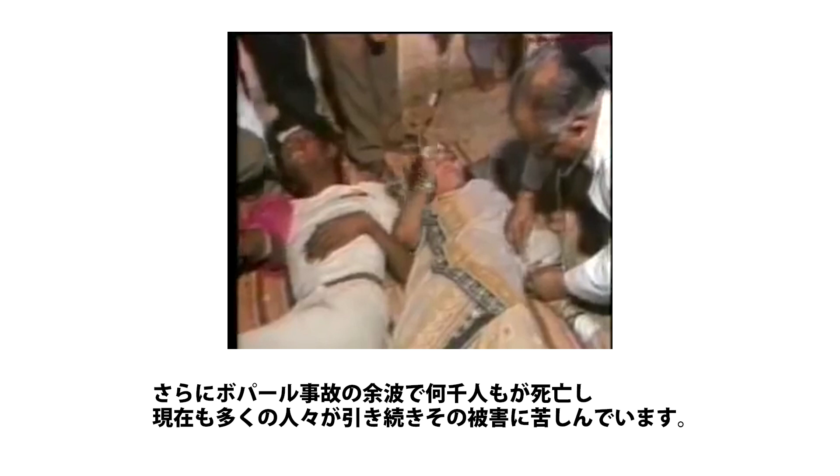Thousands more died in the aftermath of Bhopal, and tens of thousands continue to suffer today. But Bhopal also brought about change. Bhopal totally changed the understanding of potential process safety hazards in the chemical industry. Bhopal spurred Congress to require new OSHA and EPA regulations covering chemical process safety. And Congress established the CSB to independently investigate chemical accidents.

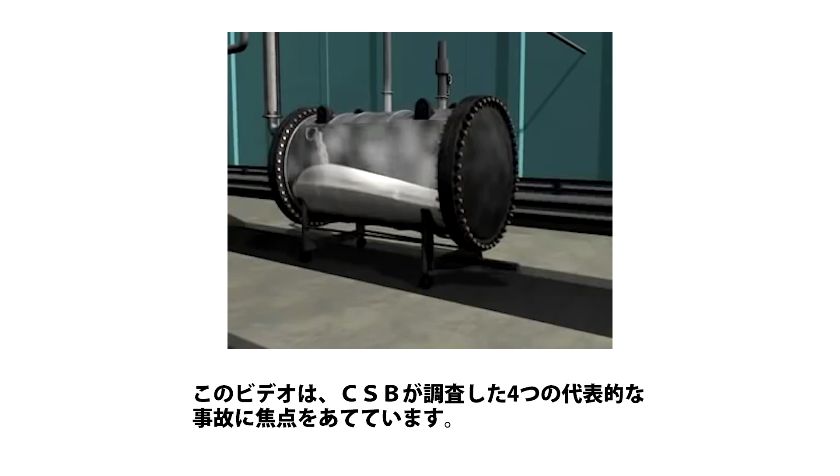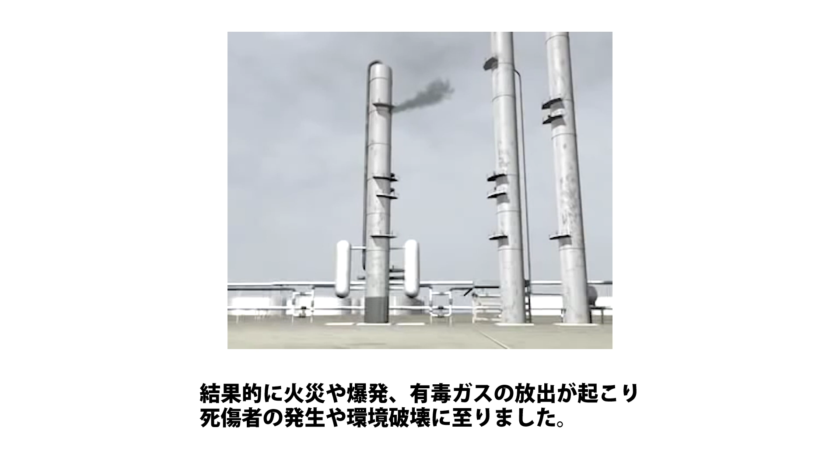There have been many positive changes in chemical industry process safety since 1984, when the Bhopal nightmare occurred. But the CSB has found that accidents involving reactive chemicals still occur all too frequently, and often with tragic results. This video focuses on 4 major accidents investigated by the CSB, accidents that demonstrate what happens when reactions run out of control, resulting in fires, explosions, and toxic releases that cause death, injury, and environmental damage.

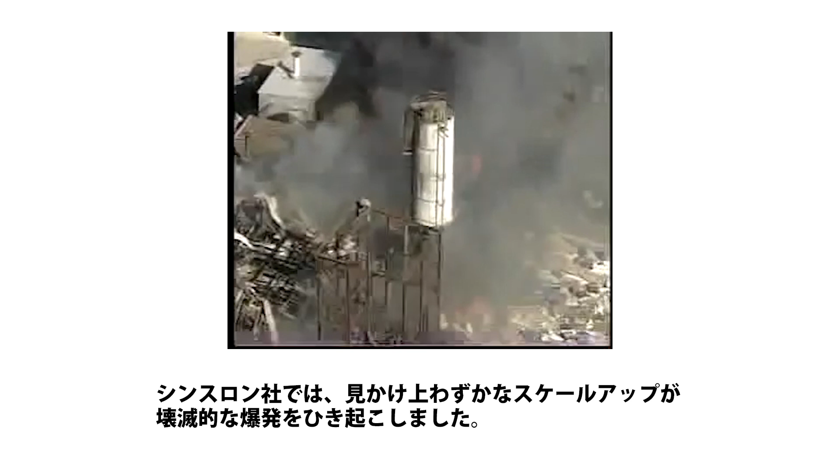Such an accident unfolded on the morning of January 31, 2006, when a vapor cloud exploded at the Synthron acrylic polymer manufacturing plant in Morganton, North Carolina. The blast killed 1 worker and injured 14 others. It destroyed the facility and damaged nearby structures. At Synthron, a seemingly minor increase in the size of a production batch led to a catastrophic explosion. It was a tragic example of what happens when process changes are not managed carefully.

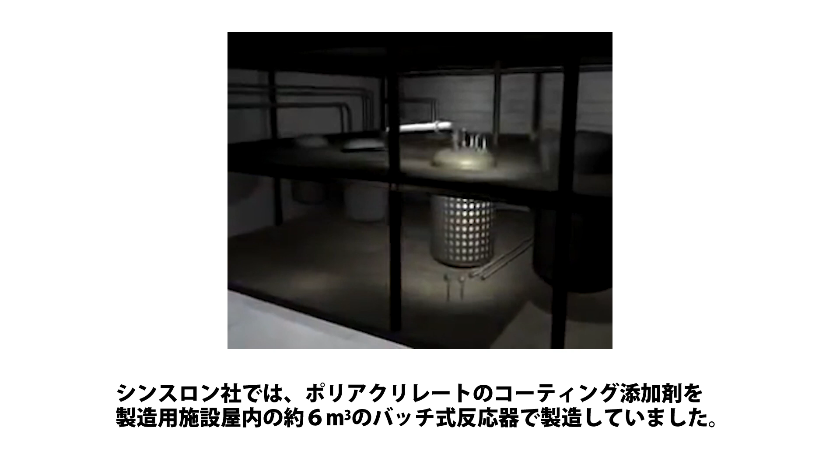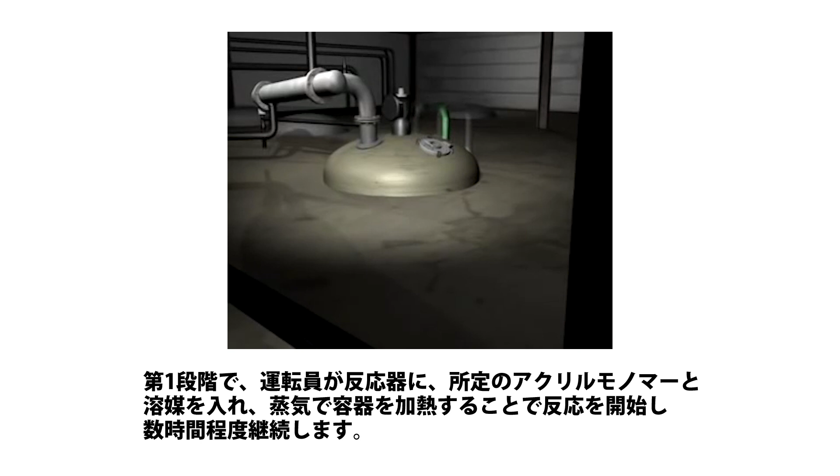Synthron manufactured acrylic polymer coating additives in batches using a 1,500-gallon reactor located inside a production building. The company had produced the polymers for years without serious incident, typically using a 2-step process. In the first step, operators would partially fill the reactor with acrylic monomer and solvent, warm the vessel with steam, and then initiate and run the reaction for up to several hours. Later, in a second step, operators would gradually pump in the remaining acrylic monomer and continue the reaction until the vessel was nearly full of product.

Both steps of the reaction generated heat, causing the solvent to boil. An overhead heat exchanger condensed the hot solvent vapors and sent cooler liquid back into the reactor, keeping the temperature and the reaction under control.

Shortly before the accident, Synthron received an order for an acrylic product that was 12% larger than the standard batch size. Rather than fulfilling the order by making 2 smaller batches, managers decided to make a single, larger batch and to add all of the extra acrylic monomer during the first step of the process. But this was a critical mistake. Adding the extra monomer all at once more than doubled the heat released by the reaction.

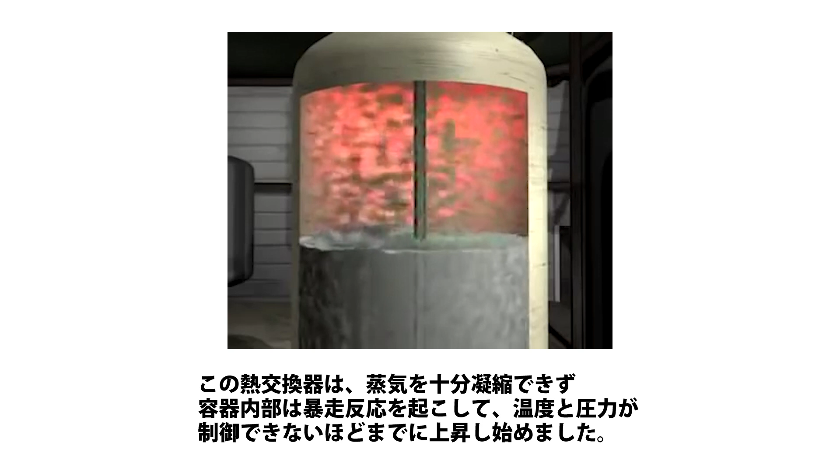The heat exchanger could not condense the vapor quickly enough, and the temperature and pressure inside the vessel began to rise uncontrollably in a runaway reaction. The pressure caused the gasket on a hatch to fail, releasing flammable solvent vapor into the building. Employees heard a loud hissing sound, saw the escaping vapor, and fled the building. 4 workers gathered outside a doorway, where they were joined by the plant superintendent and the plant manager.

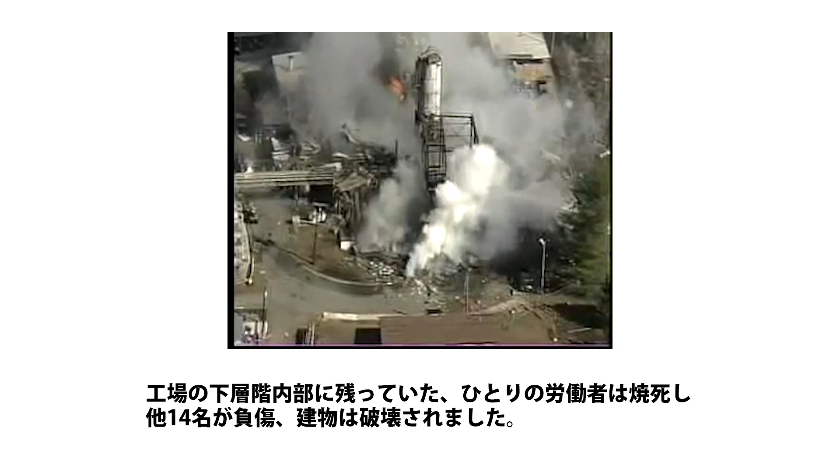One of the operators went back inside the building in an attempt to send emergency cooling water to the reactor. But it was too late. The operator returned to his companions outside. Seconds later, the solvent vapor in the building exploded. A worker who had remained inside the lower level of the plant was fatally burned, and 14 others were injured.

The building was destroyed. The Synthron accident underscores the need for well-rehearsed evacuation plans. Furthermore, it's critically important for companies to carefully review the effects of making even small changes to reactive process conditions.

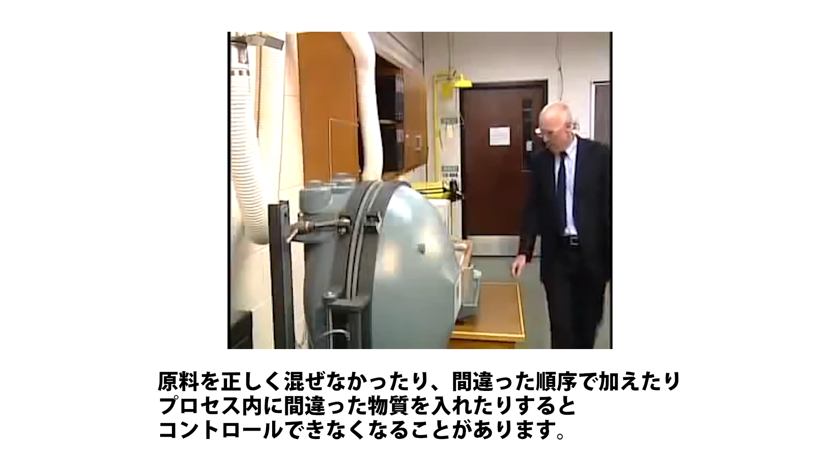Anytime you are rearranging molecules, you have reactive chemistry, and the potential for a reactive chemicals accident is possible. Dr. Daniel Crowl is a chemical engineering professor and process safety expert. If you don't mix the raw materials properly, if you add them in the wrong order, if you add the wrong materials into your process, you will lose control of the mass.

In 2002, the CSB completed a comprehensive study of reactive chemical hazards, issuing key safety recommendations to OSHA and the EPA, as well as trade and industry groups. A number of the recommendations have yet to be adopted. The report identified 167 serious accidents involving uncontrolled chemical reactions in the United States over 2 decades, causing 108 deaths and hundreds of millions of dollars in property damage. More than half involve substances not covered under current federal process safety regulations.

Between 2002 and 2007, the CSB investigated 10 additional serious reactive accidents and identified many others that caused deaths, injuries, evacuations, or property damage. Just because the initial screening method says you probably don't have a clearly identifiable reaction hazard, that doesn't mean that that reaction hazard doesn't exist. And you probably need to look into your chemicals and their properties and their reactive nature a lot more thoroughly than you think you need to.

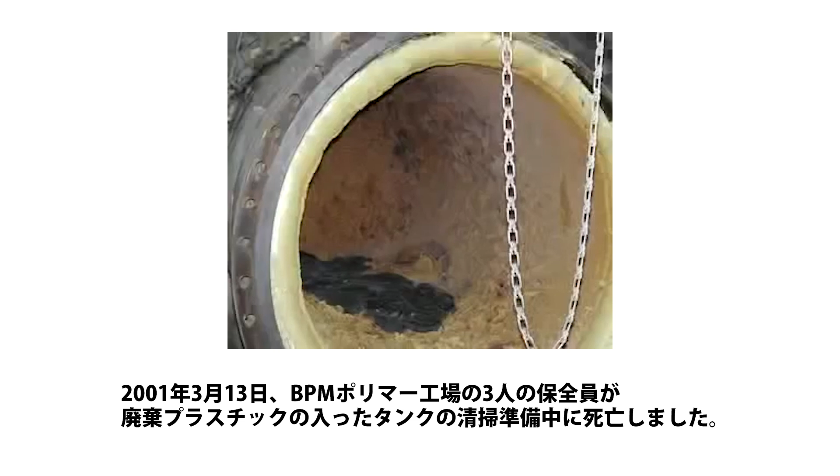Reactive incidents can occur even when plant personnel are unaware that chemical reactions are taking place. That's what happened at an Augusta, Georgia plastics manufacturing plant in 2001. On March 13, 2001, 3 maintenance workers at the BP Amoco polymers plant were killed while they were preparing to clean out a tank that held waste plastic.

BP Amoco made high-performance nylon by pumping raw materials through a heated reactor and then using an extruder to form the hot plastic into solid pellets.

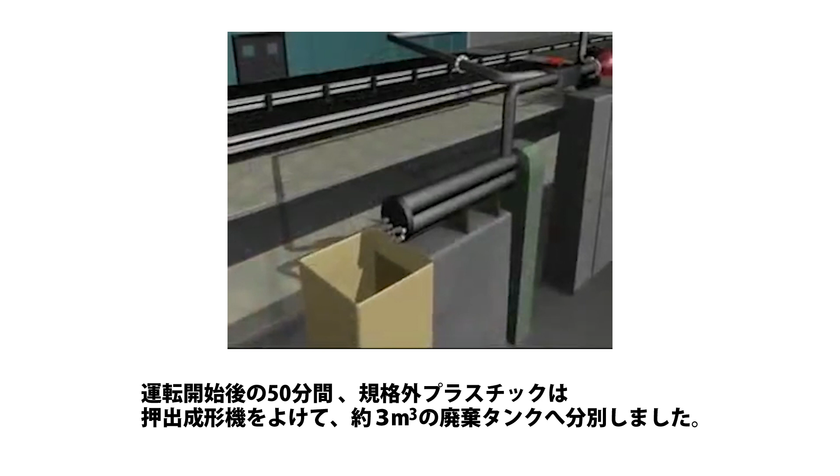During the first 50 minutes of startup, plastic considered unusable was diverted away from the extruder to a 750-gallon waste tank. Steam and gases escaped through a vent in the waste tank, preventing any accumulation of pressure inside. The contents of the tank were allowed to cool down over a period of hours. Workers then opened the cover to remove the waste plastic.

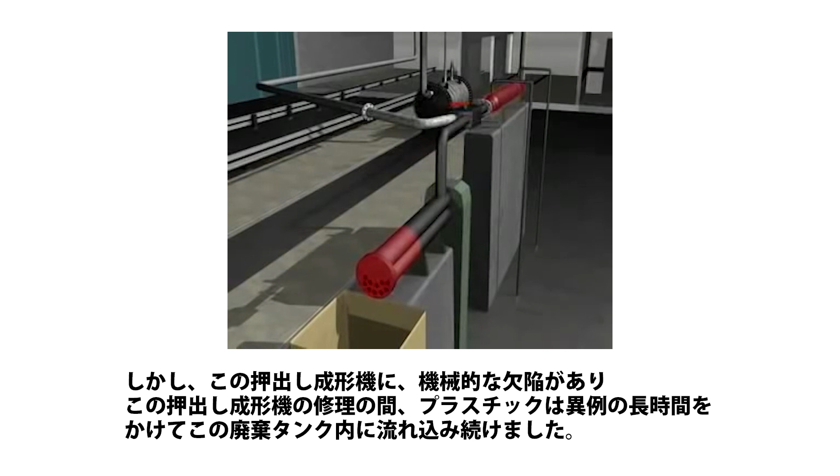On the afternoon before the accident, operators began to start up the process, but there was a mechanical failure in the extruder. While the operators tried unsuccessfully to fix it, hot plastic continued flowing into the waste tank for an unusually long time. Supervisors eventually aborted the startup, but by then the waste tank had already overfilled with molten plastic.

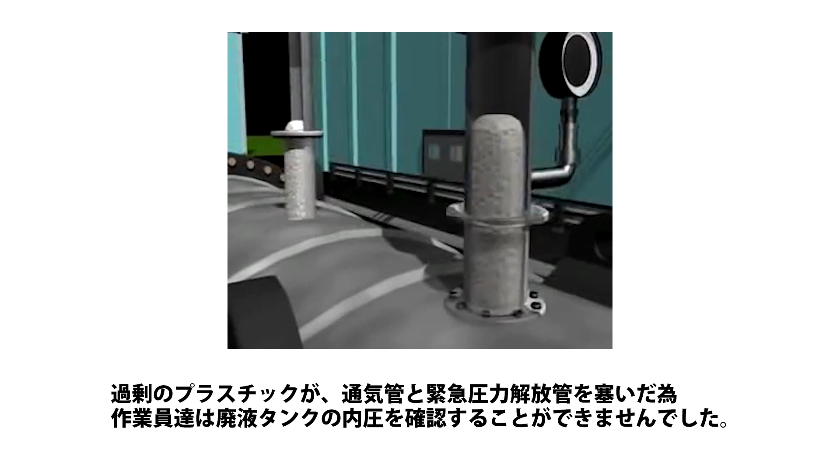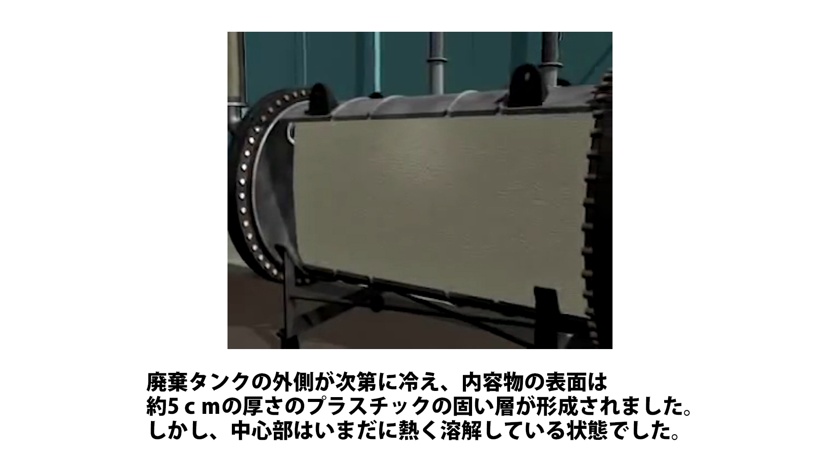The excess plastic clogged the vent line and the emergency pressure relief line. With the lines and pressure gauge now sealed off, workers would have no reliable way of determining whether the tank was under pressure. As the outside of the waste tank gradually cooled, a hard plastic layer several inches thick formed around the inside surface of the tank, but closer to the center, the plastic still remained hot and molten.

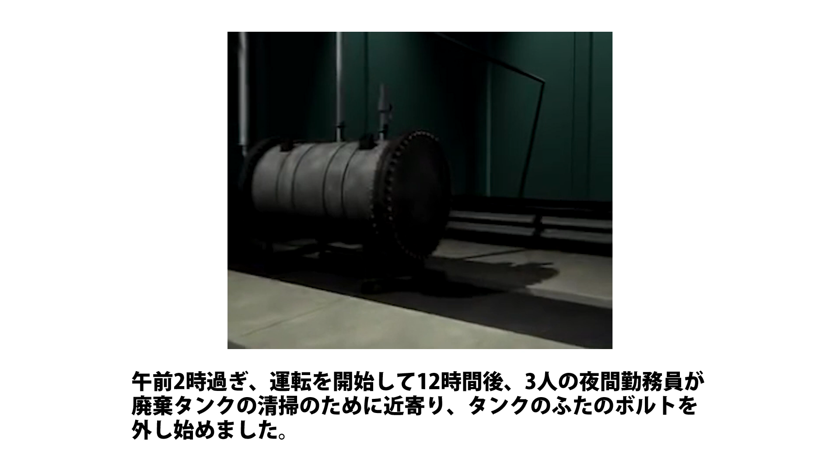Unknown to workers, a slow decomposition reaction was occurring inside the molten plastic. Over a period of hours, the hot plastic molecules were breaking down, forming gas bubbles and causing a dangerous buildup of pressure. Just after 2 a.m., 12 hours after the startup attempt, 3 night shift workers approached the waste tank to clean it out.

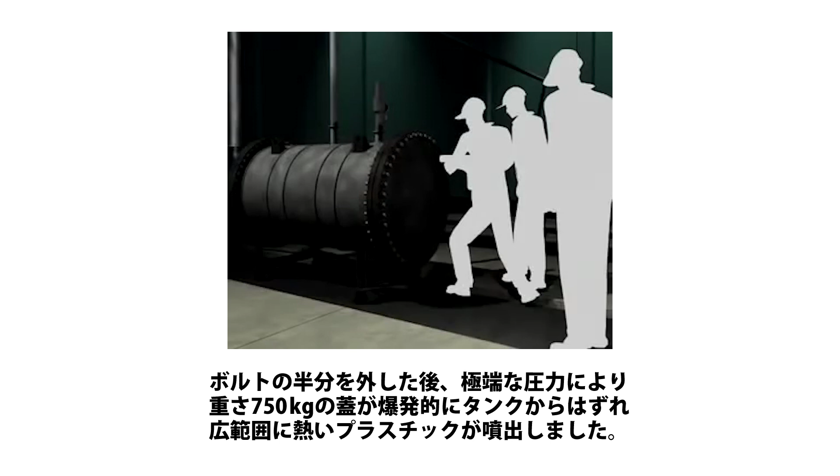The workers began to unbolt the cover of the tank. After they had removed half the bolts, the extreme pressure blew the 1,650-pound cover off the tank with explosive force and ejected hot plastic over a wide area. The waste tank recoiled backward, breaking hot oil pipes and creating a vapor cloud which ignited 6 minutes later.

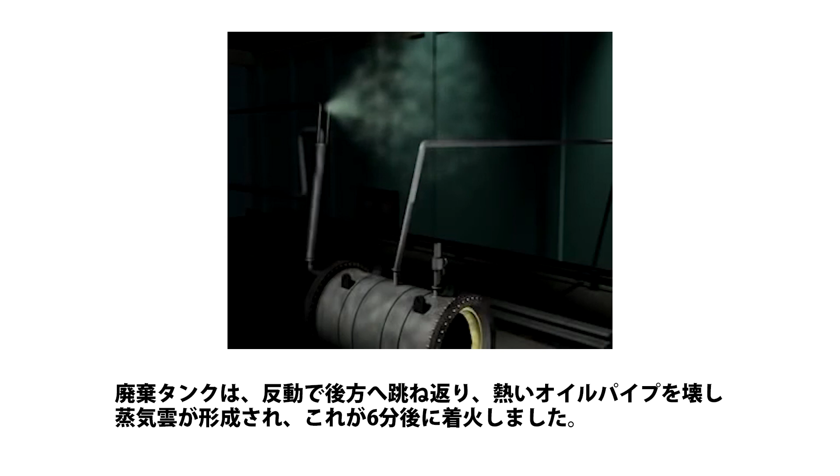Two of the maintenance workers were killed instantly when the tank cover blew off. The third was pronounced dead on arrival at a hospital.

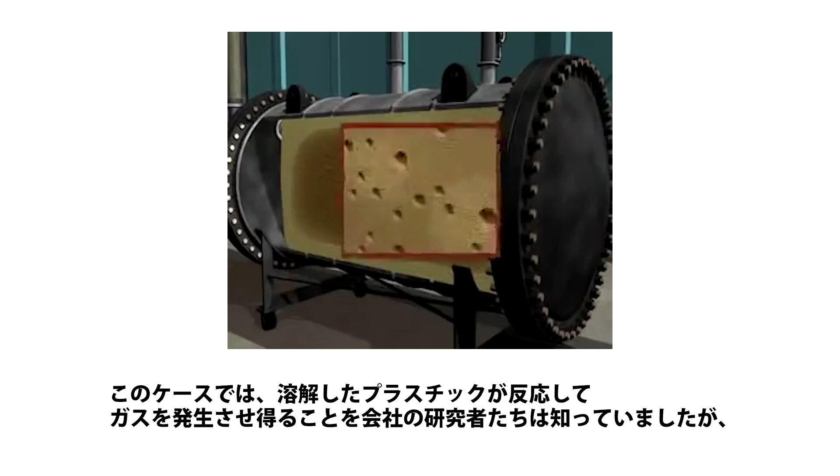This accident shows how even slow chemical reactions that don't produce any heat can still be hazardous. In this instance, company researchers knew that molten plastic could react to produce gas, but that information was not sufficiently incorporated in the design of the process or communicated to workers.

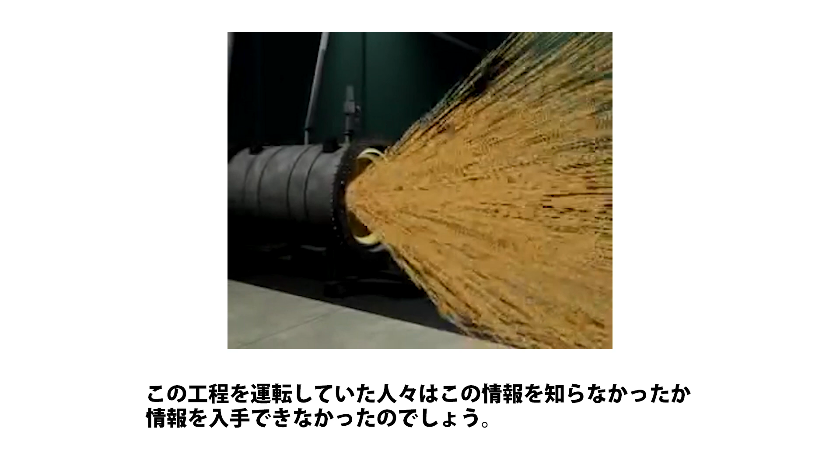I think that is one of the main issues. And it's not so much that nobody was aware of that information, but rather that the people who were actually operating the process didn't have the information or didn't have access to it. But somebody, somewhere, even within the same organization, often had that information. So a lot of the problem, I think, is education and awareness.

If you were never in an explosion, it's a horrible feeling. You'll never forget it.

Robert Oliver was a victim of a reactive chemical accident at Morton International in 1998 in Paterson, New Jersey. He and other survivors spoke about the human impact of such accidents at a CSB public hearing on reactive hazards in 2002.

I hope this would help not only the United States, but the whole world to be more careful or get more insight on the chemical that they're working with.

I can remember when the fireball hit. I can remember being blown through the air. I can remember the fire. I remember the pain. I lost track of time. I went blank or something. I don't know how I got out of that area.

If my coming here today should save one life or stop somebody else from going through the nightmare I have been living, then it's worth coming here and going through the pain of living it again.

Thank you. The CSB's 2002 study found that over 90% of serious reactive chemical accidents involve hazards that have already been described in the publicly available literature.

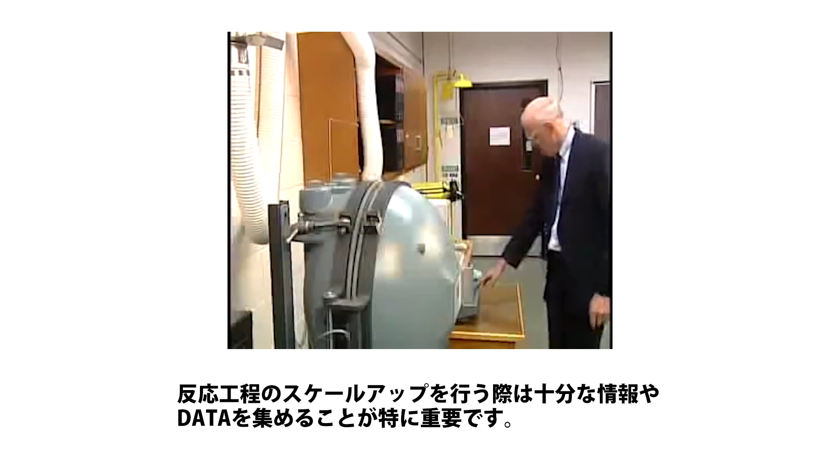The board recommended that, to better understand reactive hazards in their processes, companies should consult multiple sources of information and conduct specialized testing if necessary. Collecting adequate safety information and data is especially important when scaling up a reactive process.

On April 12, 2004, the MFG Chemical plant in Dalton, Georgia, experienced a runaway chemical reaction. It caused the release of highly toxic vapors into a residential community. The CSB determined that the accident occurred because MFG did not safely scale up a chemical reaction from the laboratory to a large production vessel.

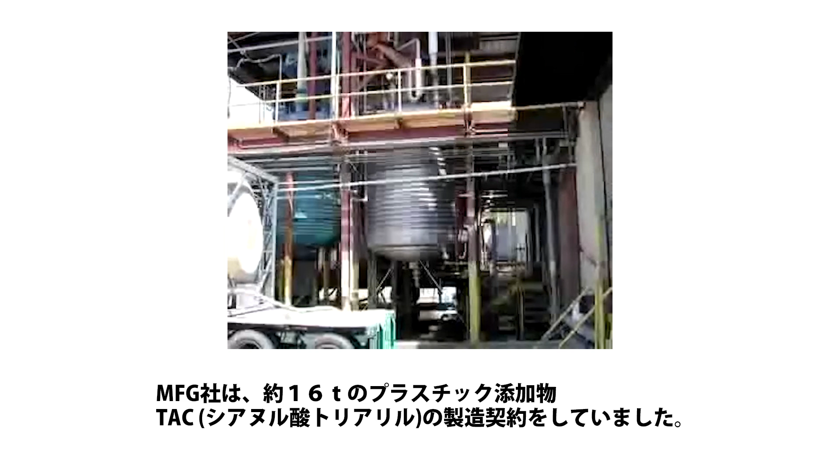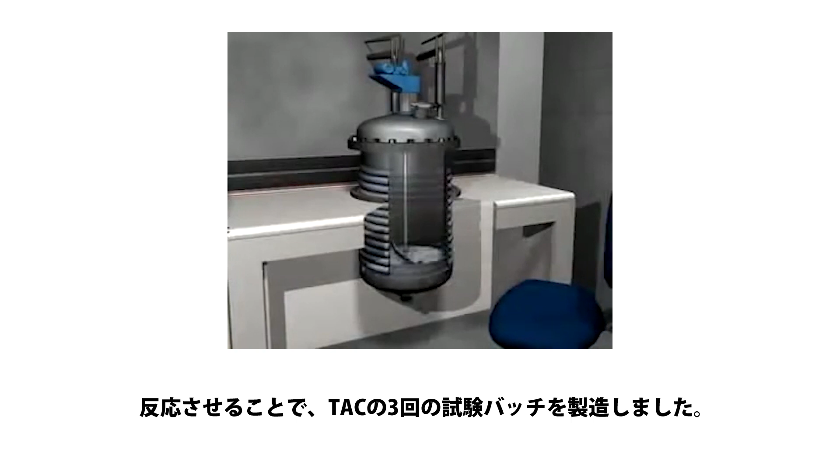MFG was contracted to manufacture 35,000 pounds of a plastics additive called triallyl cyanurate, or TAC. The company produced 3 trial batches of TAC by reacting allyl alcohol and cyanuric chloride inside a small 30-gallon test reactor. In the first 2 tests, operators controlled the exothermic, or heat-producing, reaction by adding one of the raw materials in small portions. In the third test, all of the chemicals and a catalyst were combined in the test reactor at one time, which was the procedure that MFG later decided to use when scaling up to full production.

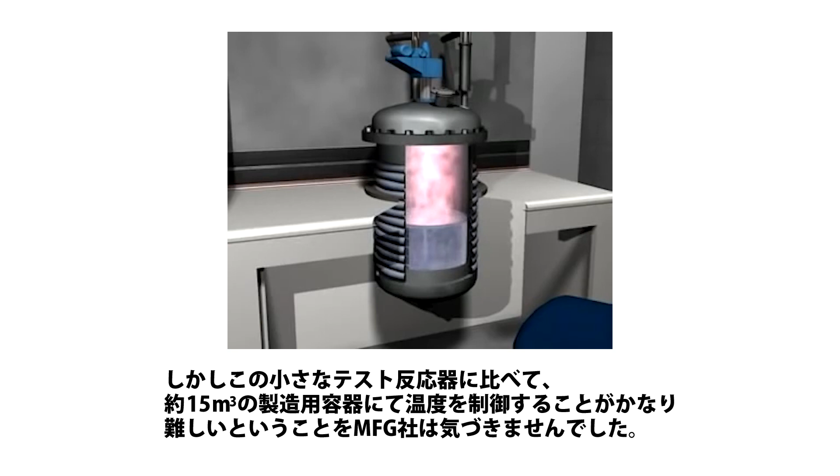This third test produced significant heat, but the water cooling jacket around the small vessel was able to keep the temperature low and control the reaction. However, MFG did not realize that compared to the small test reactor, it would be far more difficult to control the temperature in the 4,000-gallon production vessel. The surface area to volume ratio was much lower in the production vessel than in the test reactor.

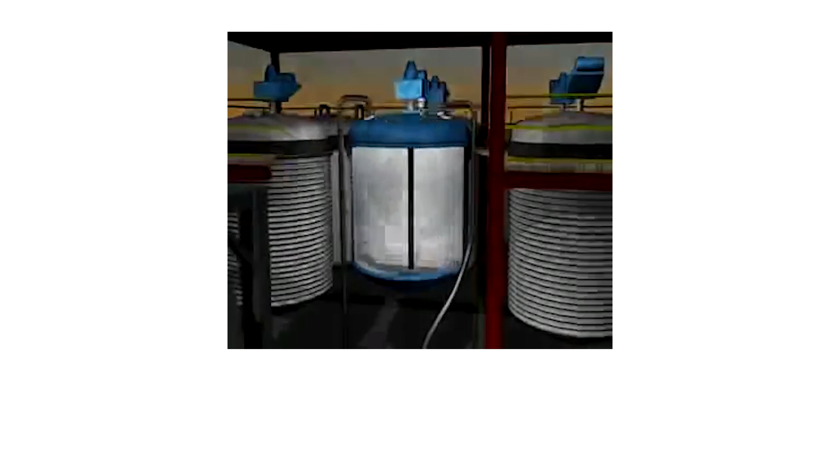Starting the production process for the first time, operators loaded the large vessel with all of the cyanuric chloride powder and the catalyst. They then added all of the allyl alcohol and began mixing the chemicals.

To control the temperature, MFG had rented a portable chiller and connected it to the cooling jacket on the vessel. But as soon as all of the raw materials were combined, the reaction began producing heat faster than the cooling system could remove it. The temperature increased uncontrollably, and with all of the raw materials already in the vessel, nothing could be done to control the reaction.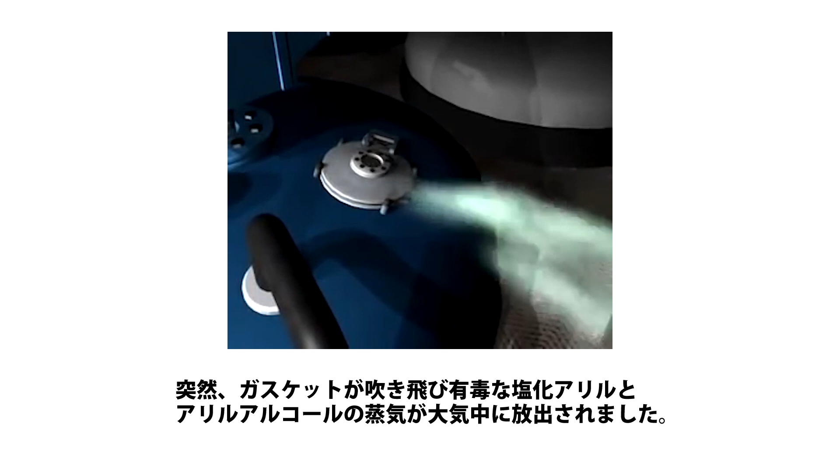The pressure inside the reactor climbed rapidly as the mixture heated. Suddenly, a gasket blew out, releasing toxic allyl alcohol and allyl chloride vapors into the atmosphere. About 10 seconds later, the emergency pressure relief rupture disc burst open, releasing more vapor.

Unable to slow the reaction or contain the release, the operators were forced to evacuate to a safe location upwind. The toxic vapors quickly spread into the residential neighborhood east of the facility. Authorities ordered the evacuation of more than 200 families, but the town had not trained or equipped its emergency responders for such an accident. 154 people had to be decontaminated, including 15 police and ambulance personnel.

This accident emphasizes the need for emergency responders to be fully prepared for a toxic chemical release.

The CSB found the company could have prevented the accident by better understanding the chemical process and knowing how to prevent a runaway reaction. You don't want to be learning about chemical reactions in a 5,000-gallon vessel. You want to learn about it in a small vessel in the laboratory and understand what's going on, so that by the time you get to the large manufacturing vessel, you already know those things. You don't want to get surprises on a large scale.

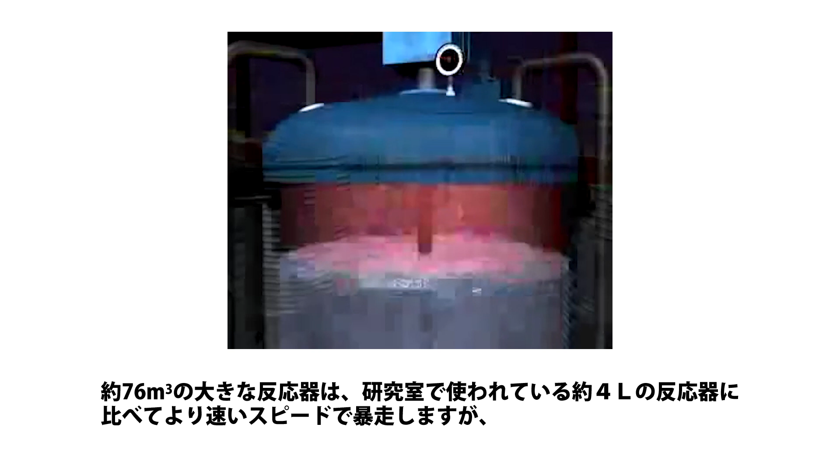A large 20,000-gallon reactor will run away a lot faster than a 1-gallon reactor that you're using in the laboratory. And somehow human nature is to believe that larger is slower, and in the case of reactive chemicals, a larger chemical reactor will actually run away a lot faster than a smaller chemical reactor.

Chemical reactions where high temperatures cause decomposition can produce powerful explosions. Few people realize how much destructive energy can be released, as in the following accident at a Mississippi chemical plant.

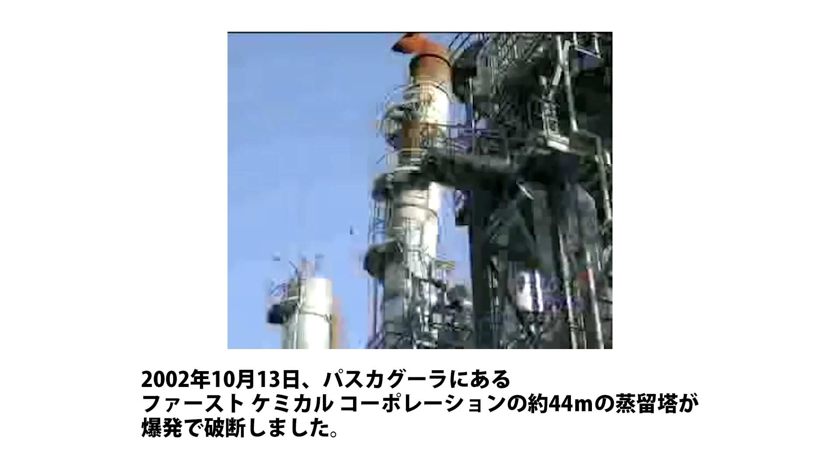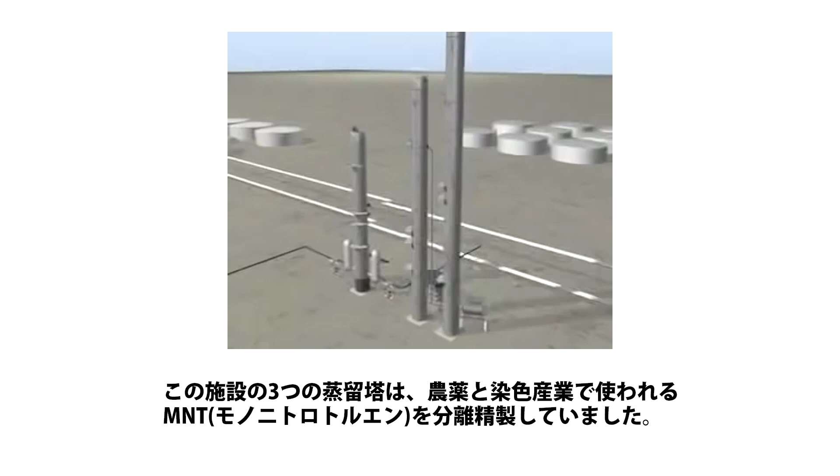On October 13, 2002, an explosion tore apart a 145-foot distillation tower at the First Chemical Corporation in Pascagoula. 3 distillation towers at the facility separated and purified mononitrotoluene, or MNT, which is used in the manufacture of dyes and agricultural chemicals. The entire facility was shut down for routine maintenance.

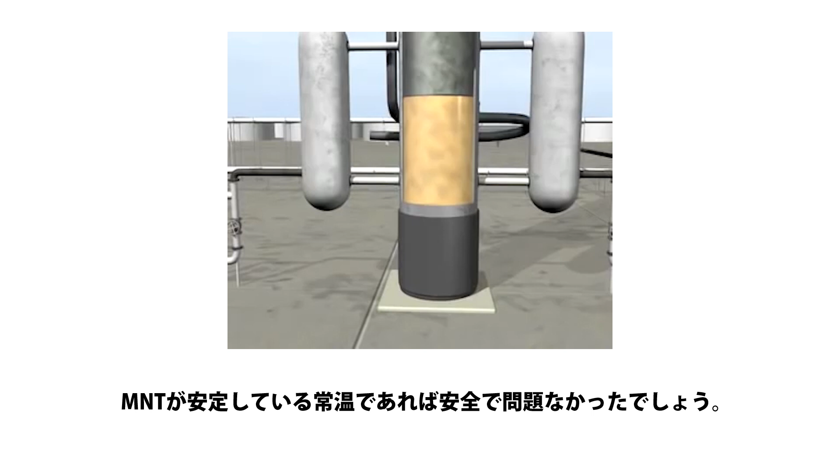Plant operators decided to leave 1,200 gallons of MNT inside one tower during the shutdown. This would be safe at normal temperatures where MNT is stable. The heating was shut down on the 2 reboilers by closing the steam supply valves.

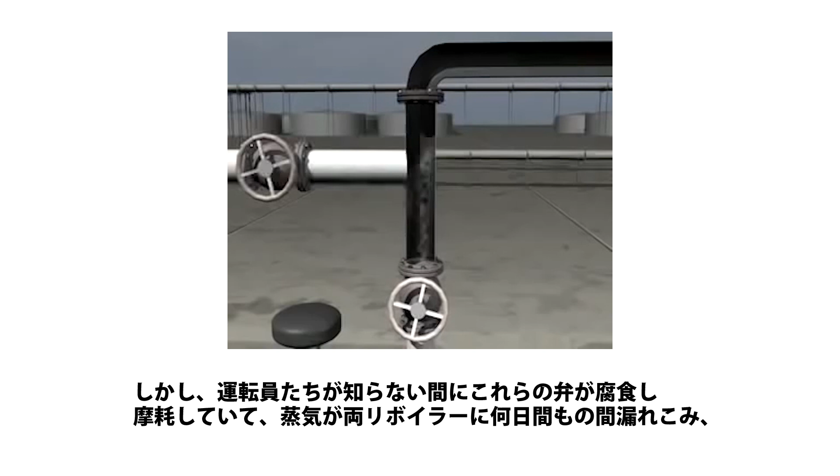But unknown to operators, these valves were corroded and worn. Steam leaked into both reboilers over a number of days, heating up the MNT, causing it to break down and become unstable.

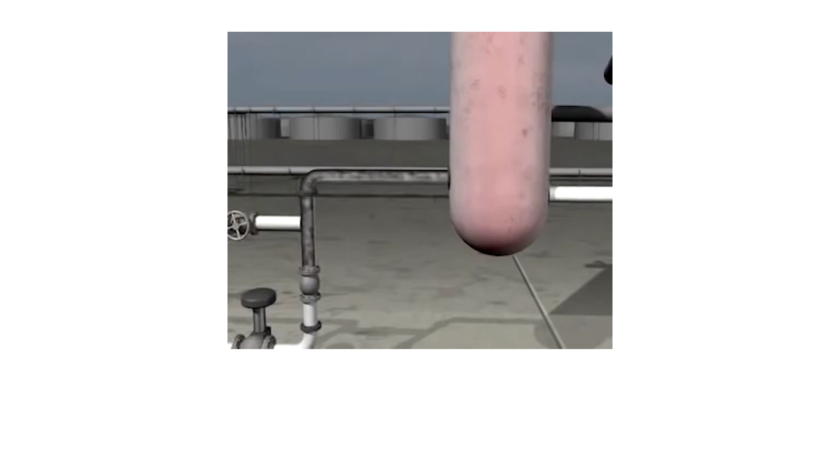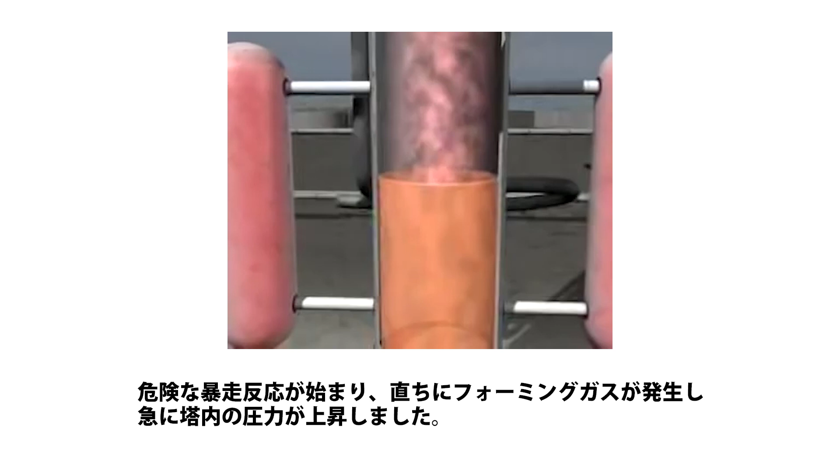On the morning of the accident, the temperature inside the tower reached 450 degrees Fahrenheit. A dangerous runaway reaction began, rapidly forming gas and suddenly building up pressure inside the tower. The tower began to rumble, and employees saw material venting quickly from a breach high in the tower. A short time later, the tower ruptured.

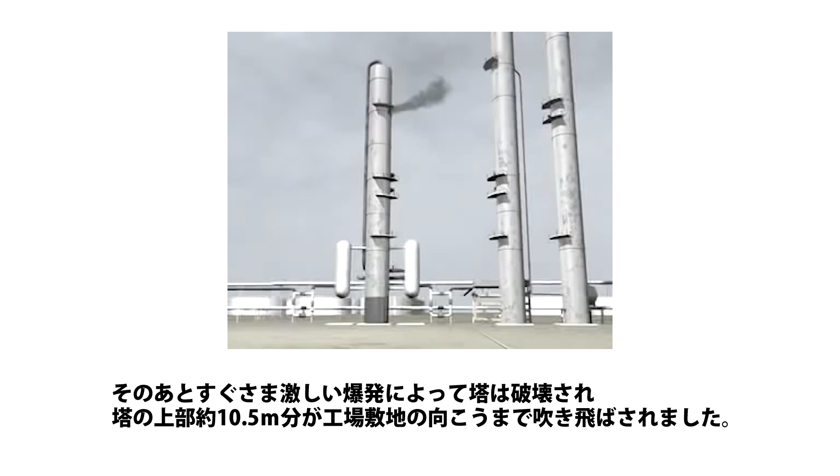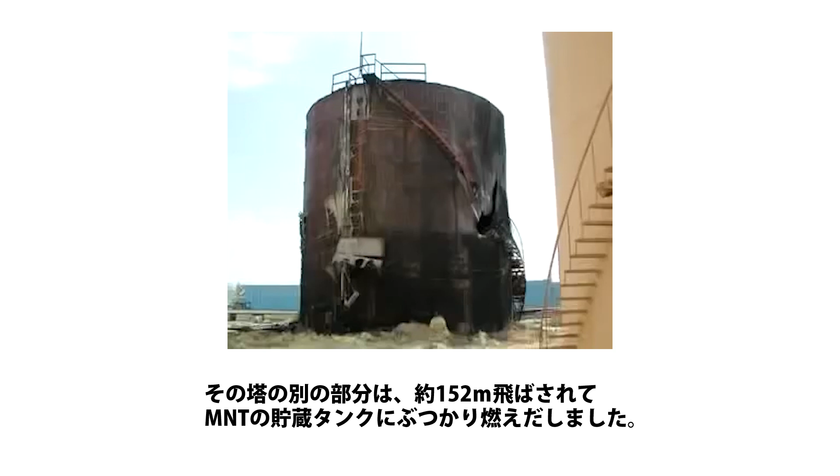The violent explosion propelled the top 35 feet of the tower well beyond the plant site. Another piece of the tower sailed 500 feet and hit a storage tank of MNT, setting it ablaze.

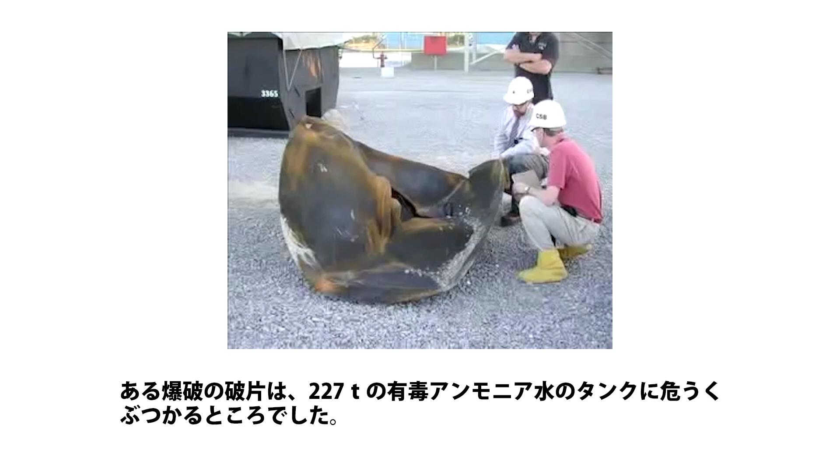A 6-ton piece of the tower sidewall flew 1,100 feet and came to rest just 50 feet from a 250,000-barrel crude oil storage tank. A piece of shrapnel nearly hit a 500,000-pound tank of toxic anhydrous ammonia.

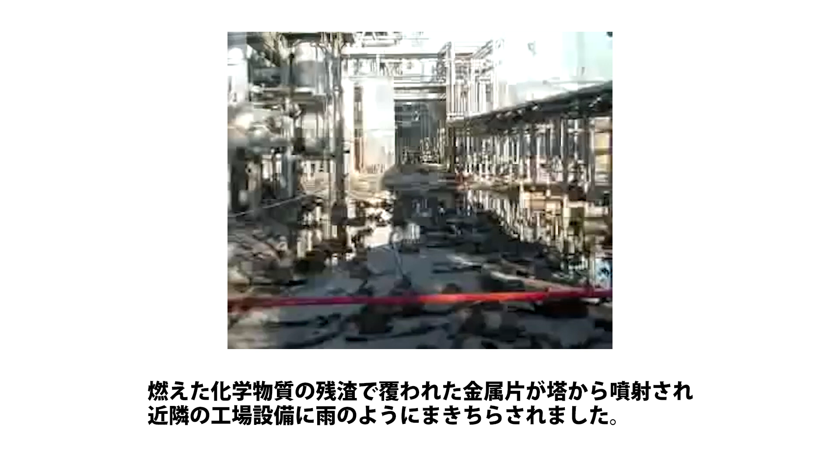Metal packing covered in flaming chemical residue ejected from the tower and rained down across the facility and neighboring plants. The explosion knocked down 3 operators who had taken shelter just inside the control room door.

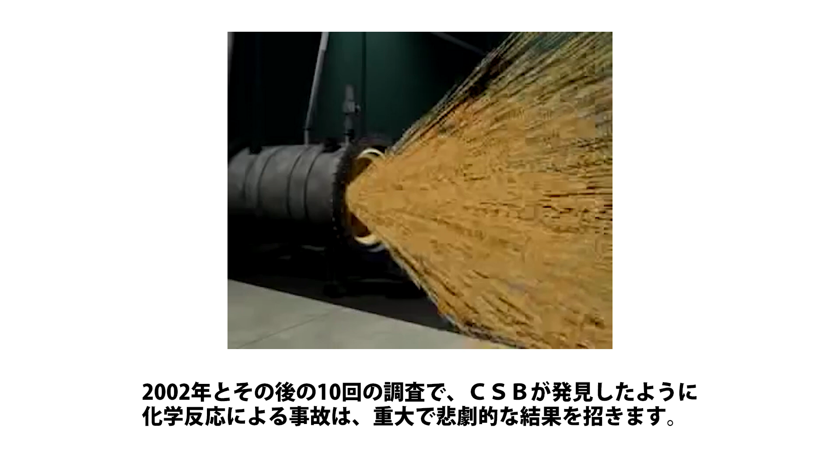As the CSB found in its 2002 study, and in 10 subsequent investigations, reactive accidents can have serious and tragic results. To prevent these accidents, companies should identify and thoroughly evaluate reactive hazards in their processes.

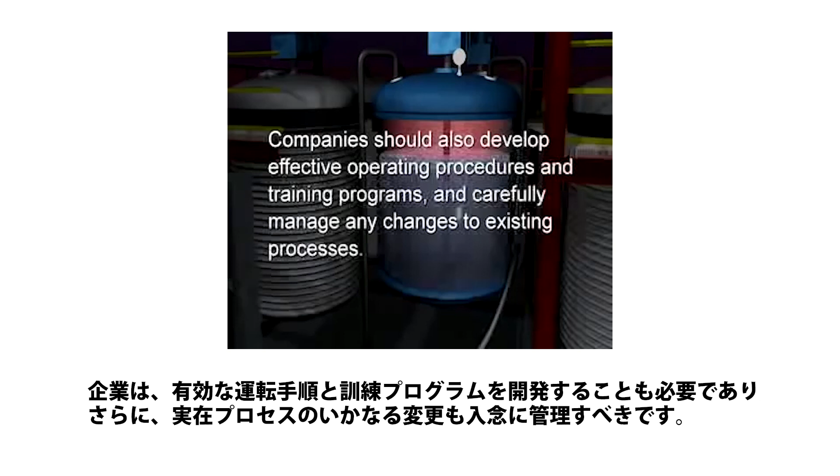Appropriate emergency pressure relief systems and other design safeguards need to be in place. Companies should also develop effective operating procedures and training programs, and carefully manage any changes to existing processes. Finally, facilities need to plan for possible accidents, including evacuation drills and emergency response exercises.

The most important thing to managing reactive chemistry hazards is that you have to have a thorough and complete understanding of your chemistry under design conditions and also under all foreseeable abnormal conditions.

The main message I have is that we cannot avoid reactive chemical hazards. However, chemical plant accidents involving reactive hazards are unacceptable. The technology and the management systems do exist to produce these products safely.

Much progress has been made in chemical process safety since the Bhopal accident in 1984. But deaths and injuries continue to occur from uncontrolled chemical reactions, and significant gaps remain in federal regulations and industry programs to control reactive hazards. It's time to redouble our efforts to prevent these tragedies.